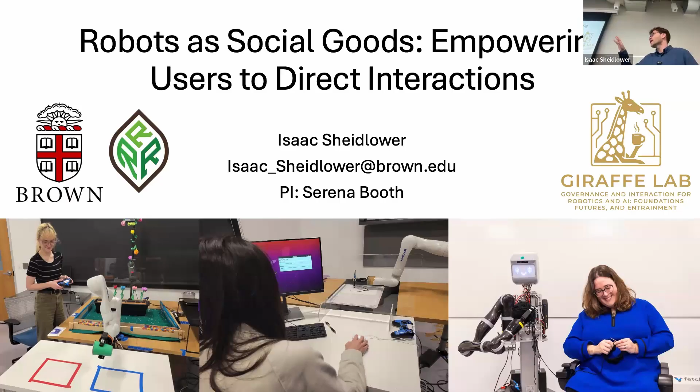And because this is an AI seminar, I want to start with the question of why robots? Why do I care about robots? Why should you care about robots?

Robots are, in general, a way of interacting with the physical world. They can be an assistive tool for different tasks. For example, a robot assisting people with spinal cord injuries or limited mobility to help them feed. We have different fetching tasks - you can imagine a robot in your home and you say, fetch me my laundry, or fetch me my milk for the morning, and the robot will go autonomously get it. There are various other assistive tasks you might imagine, like cooking, crafting, or fixing various things.

Robots can also be a collaborative tool. Here's an example of a robot assembly task where a robot is handing people parts of a structure, and they're collaborating to build the structure more quickly.

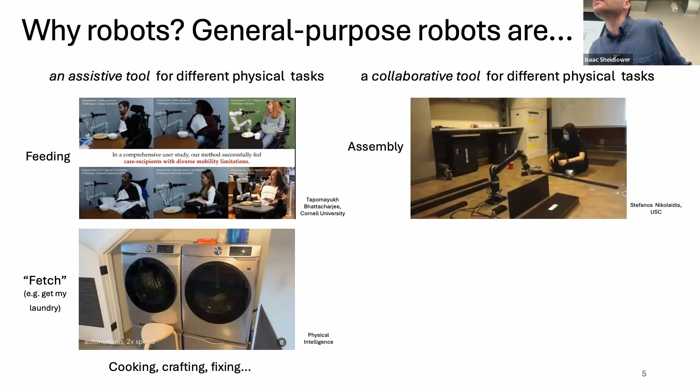What? So this paper specifically, I believe, was during COVID-19. Well, COVID still exists, but yeah.

Another example could be collaborative lifting. I don't have a cool video, but here's me and a robot collaboratively lifting this tray. But we could also think of collaboratively lifting a heavy box, for example, upstairs. And many more creative tasks, which we'll see some examples of throughout the talk today.

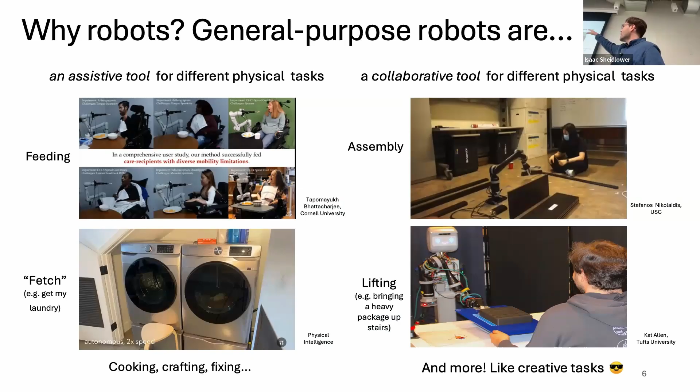So here we have this general purpose robots wording. What do I mean by general purpose robots? I mean robots that can be used for many different tasks as decided by users - people who are using the robot, as opposed to people who designed it. We can think of morphologies like robot arms or mobile manipulators, where they can do somewhat of an arbitrary range of tasks, or at least many different tasks. Whereas things like autonomous vehicles or Roombas, robot designers or manufacturers design them for a specific purpose, and it's pretty hard for end users to adapt them to different tasks.

So that's kind of what we're going to be talking about today: thinking about general purpose robots. Oh, and I should mention, feel free to interrupt at any point for questions, but I'll also have some specific pauses we'll ask.

So where are general purpose robots headed? I think a lot of industry and academia centers around this vision of the home robot, specifically this robot butler idea, where you own one or more robots, and they can help you do anything around the house, like chores or different tasks. Industry, especially recently, is very into humanoid robots as the morphology that can accomplish this goal.

This model of you're a family and you own a robot, or you're an individual and you own a robot in your home, is really great for a lot of reasons. One, you can personalize it over time - you own this robot, it's in your house, so you have lots of time to interact with it, and you can customize it to yourself. If you want to paint the robot a certain color, go ahead. And you can use it whenever you want, on a whim - you might wake up at 3 in the morning and say I need a robot to do something, and it's right there.

But I want to think a little bit about alternatives, and whether this model of robot ownership, or the future of robots, is equitable to everyone.

So let's start with a motivating example - I love motivating examples. Here we have Alex, who will be a recurring character in this talk. Unlike in this family home scenario, Alex has roommates - that's the twist. One of these roommates may or may not be the Lorax, it's pretty hard to know. But Alex and her roommates might not want a general purpose robot in their apartment - either it's too expensive, or one of them feels uncomfortable, especially with humanoid morphologies. They might not want a robot walking around the apartment all the time.

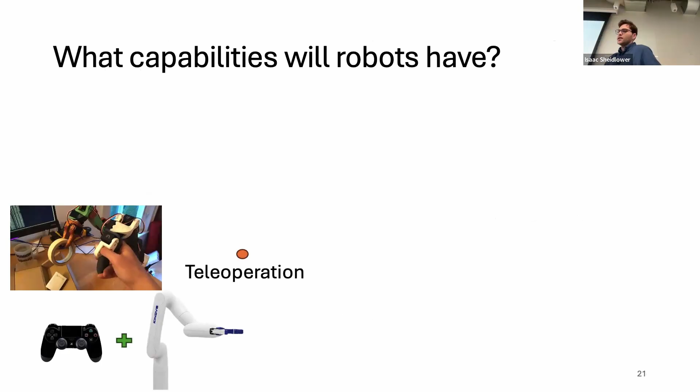Of course, the robot will have some autonomy. So there could be a set of autonomous policies, where a policy dictates the task and the behavior of the robot. It might be trained through different means, but it'll know how to do a bunch of basic things autonomously. So we expect a robot to be able to autonomously pick this water bottle up.

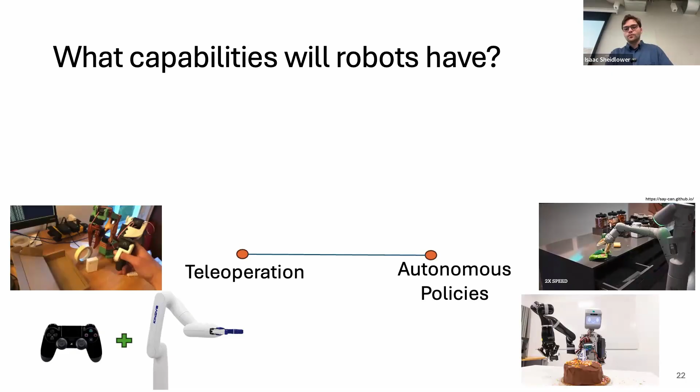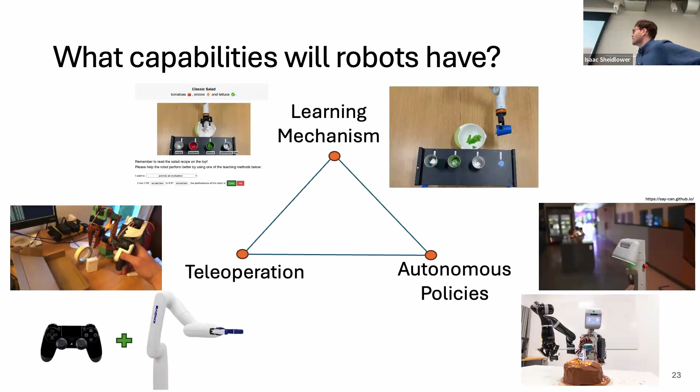And of course, because even as people we can't know everything, the robot will have some form of learning mechanism - some way of adapting to or learning after deployment. So it needs to learn, because it will try to pour the onions in and it'll miss the bowl a little bit. So how do robots learn?

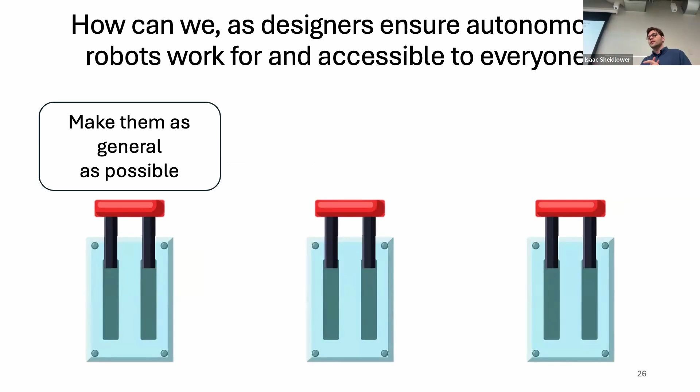So then, given the capabilities and how robots learn, how can we make robots work for everyone as social goods in this scenario? One option is to make them as general as possible - learning to do as many tasks in advance as we can. This is a very common approach in the robot learning community. We can also think of making them as adaptable as possible - a robot in a new environment needs to be able to very quickly adapt and learn to do new tasks. That's its own set of approaches we need to think about. Note these are all additive.

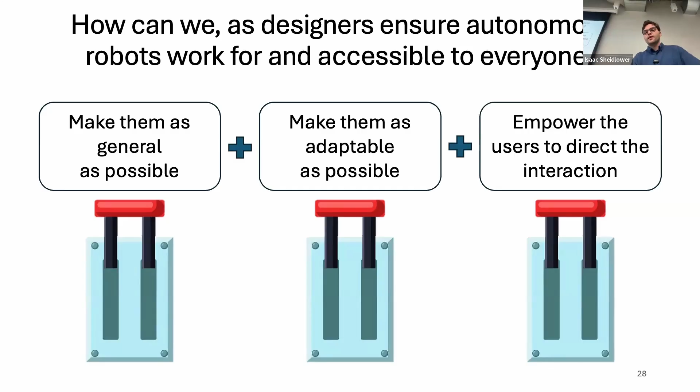And then, because we can't expect to know everything the robot might face, we could also think about empowering users to be able to direct and dictate the interaction themselves. So the first two are about how we as researchers enable the robot to be as capable as possible. This is thinking about how we give users tools to decide what the robot can and can't do specifically. We can't predict everything, and even if we could, we might not want to, because people like to have control over the technology.

So we're going to call these empowerment strategies, which will be the focus of the talk today. And really, each of these strategies or methodologies are about bridging the gap of control over the system from end users to designers.

So the first 2 are basically thinking about how users might interact with a reinforcement learning agent to control it and direct the interaction. And the last one is thinking about what sort of information people might need about a robot to be able to do these things.

Okay, let's get into the first empowerment strategy, personalized task execution. We're going to go into the most detail of this one, and this is based on a paper that was published at HRI 2024.

So the goal is to enable people to personalize robots' behavior in real time, whether that's for personalization purposes or to express themselves through a robot. And specifically, we want to empower people with control over the behavior of a task it can already perform. So the robot knows how to do a task. We want to think about customizing, for example, the style in which and the way it completes the task. And we'll see some examples.

So right, we've already seen these videos. RL is great at learning these optimal policies, this optimal way of completing certain tasks. And if we have a person in the loop, a person can teach preferences over these policies. So for example, in this case, it's the angle at which the robot should approach this table.

But ultimately, with both of these approaches, we end up with this single policy that needs to be retrained or retaught if a person's preferences change. So if my preferences change, I either need to change the reward function or I need to teach the robot my preferences. And there are scenarios where we might want to just be able to directly manipulate the robot's behavior.

So we need a formulation of how to do this and give people real-time control over these robots. So we're going to call this formulation online behavior modification, the framework or paradigm of what we want. And we're going to say there's 3 requirements of doing this.

So 1, the robot must autonomously make task progress. So what this means is if I have my robot and I try and personalize it to myself, if it starts failing at the task, that's not great, right? So we don't want the robot to fail.

Then we're going to say we want to define a set of behavior features that we can customize. So for example, in the video earlier, there was this angle of approach to the table. We might also think about customizing the robot's speed. And these different aspects of the robot's behavior, we're going to call these behavior features.

And then we're also going to require an accessible user interface. So we have these behavior features, we're going to call these K for each different behavior feature. And we're going to give people direct control over these features. And again, it needs to be interpretable and accessible. So if I change the speed of the robot, it shouldn't oscillate in some unexpected way, for example.

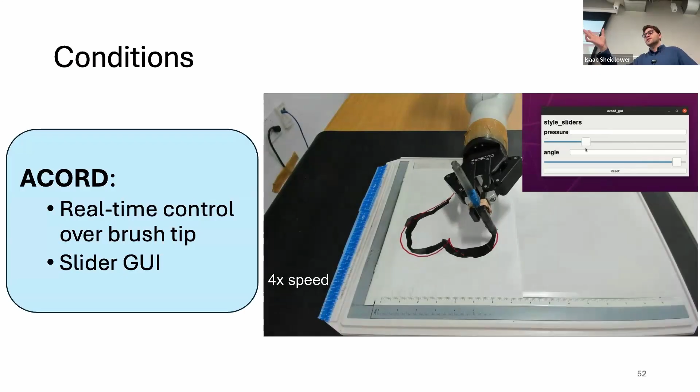Okay, so this is what ACORD looked like. We gave people a slider interface, and we defined two behavior oversight parameters. One was the pressure of the brush, so we can make thin or thick lines. The other was the angle of the brush, so we could rotate it as the robot autonomously painted. The robot is autonomously moving along this path while these values are being adjusted, and the algorithm learns to match those specific values. Again, people had practice with this interface on other shapes, so this is real-time control while the robot's also autonomously painting.

Another thing we looked at was reinforcement learning. We could imagine we have 6 predefined styles. A user selects a predefined style, and then the robot just paints it by itself. So there's no real-time user interaction, but this is analogous to a lot of existing robotic applications where you say, okay, what's your preference? You pick it, and then the robot does the task.

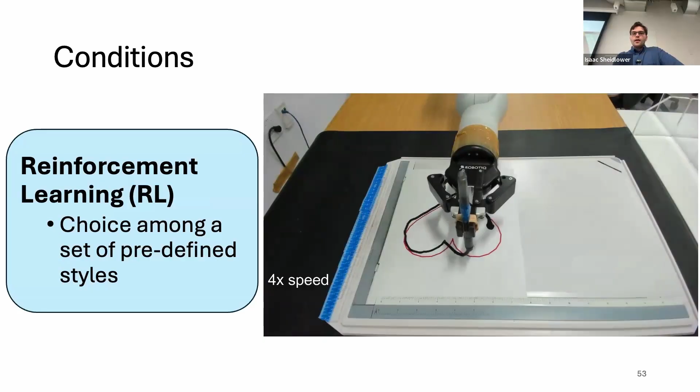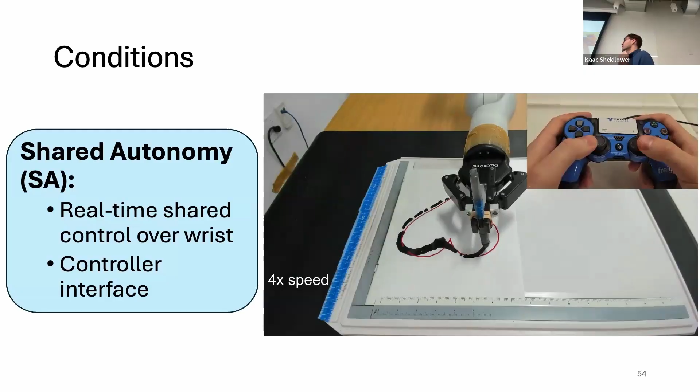And then lastly, we wanted to look at what if we gave people a lot of control over the system, and this was our shared autonomy condition. So people have teleoperation control over the robot, they can directly manipulate its actions, but while they do so, the robot's also trying to infer what style they want. There were 6 discrete styles we saw earlier, and as they're directly changing the robot's behavior, an algorithm is also trying to say, okay, I think you mean this style. There's sort of a blending going on there.

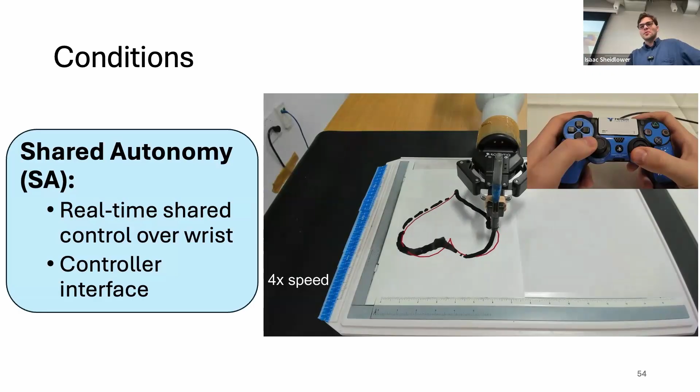Okay, so we had people come in. I think we had 24 participants, recruited from around Boston. We had a pretty wide range of people, which was nice. Let's look at some results - what did we learn from having people come in and do these paintings under these different conditions?

Qualitatively, ACORD in general, compared to the shared autonomy setting and reinforcement learning, people really liked it. People both preferred it the most, and it gave them a very high sense of expressivity and control. It was even surprising that people felt slightly more in control over ACORD than shared autonomy, because shared autonomy people had direct control over the robot. Some people commented that having direct control felt like too much control in a sense, so it was hard to manipulate.

But so that was great, that's sort of what we hypothesized. And we also saw some very interesting emergent behaviors, which is when users or end users do something that designers don't expect. Getting back to this robots as social good model, or this public library example, a ton of different people are going to be using robots. We can't anticipate every way they're going to use it.

So in the shared autonomy condition, people made polka dots. The way they did this was they brought the brush up from the paper, and then the reinforcement learning algorithm brought it back down. And so they could kind of play with it.

And even though they knew they weren't supposed to be doing this, because they're trying to cover as much red as possible, it was really fun for people. And then in ACORD, what people were able to do is wiggle these oversight parameters, which are essentially latent variables, back and forth very quickly. And it caused the robot to make very interesting brush strokes. So here we can see very varied strokes in the painting.

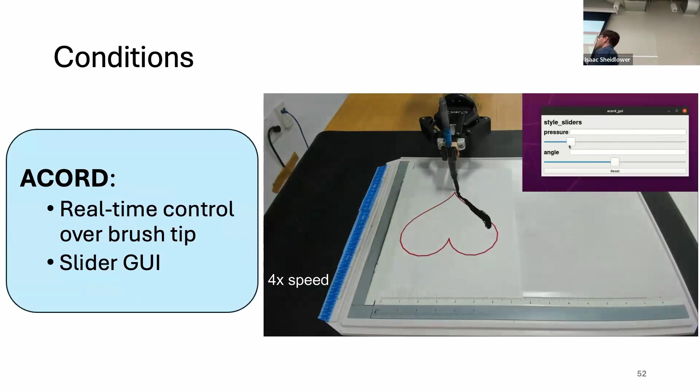The question was, how did people use ACORD specifically to compensate for the offset? So the way they were able to do this - it started off great, but basically the angle of the brush, which was supposed to be fixed, in a combination they could actually slightly adjust where the line was.

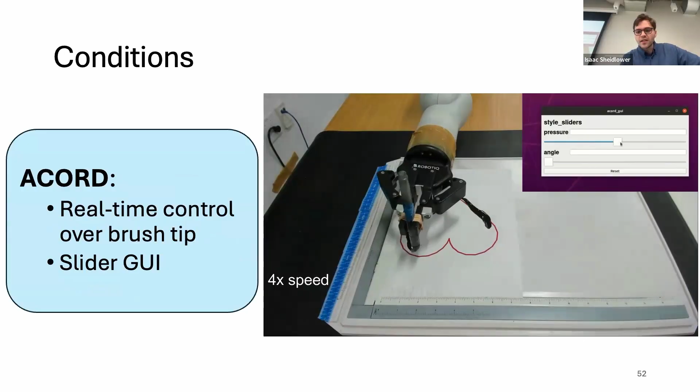So some limitations of this work - I think one was touched on with the question earlier, but we were looking at relatively simple geometric features. We could imagine how we might define the robot's friendliness as a behavior feature or something more abstract. So there needs to be more work to make an algorithm that can efficiently learn that and define those things.

And also we assumed that we knew what people would want to control in advance. So we had the pressure and the angle of brush predefined, but we can't predict everything. So future work could look at having users come in and co-design different features for different tasks.

You showed three: one is fixed policy, the second was ACORD, third was shared autonomy. Did you have full teleoperation for the user?

We did not have full teleoperation for the user. The reason is that task is potentially too difficult within a constrained lab study for people to do effectively. Also, if we set up safety constraints, even with teleoperation, people might find a way to violate them. That's a limitation on our part, but we didn't really view full teleoperation as analogous. So the through line to all of these is that the robot's autonomously tracing the shape, and it's just the style that we looked over the spectrum of control.

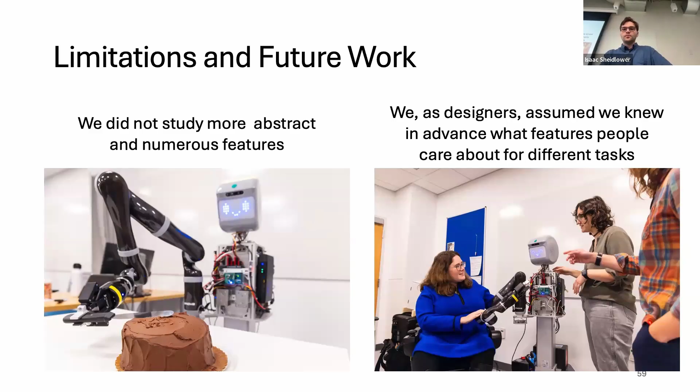Okay, great. So let's go to our next empowerment strategy, as we called it, which is facilitating innovative collaboration. The goal here is to empower people to leverage existing behaviors of a robot to perform novel tasks. Again, we're going to focus on creative tasks, but I'll give some other examples.

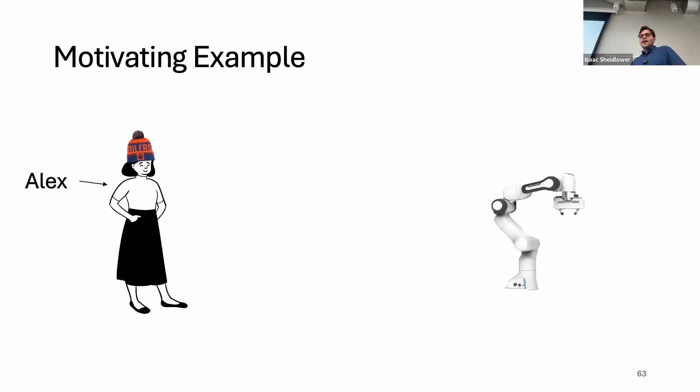The first, ACORD, was really about using an existing policy and customizing it. This is about using an existing policy for an entirely new task, separate from the predefined one. So, motivating example: again here we have Alex in her Oilers hat, which is exciting. Like we said, Alex has this robot—she may have gotten it from the library, or it may be her own robot. She has some form of teleoperation, and the robot has some set of autonomous policies.

One policy she knows of and frequently uses is this carry-liquid policy: hey, get me coffee; hey, get me water. This policy brings cups from place to place without spilling the liquid. Alex is a very creative person, and she decides she can leverage this to water her flowers. She has it carry a cup of water over her flower bed, then teleoperates the wrist to rotate it and water her flowers. This is a fun emergent interaction.

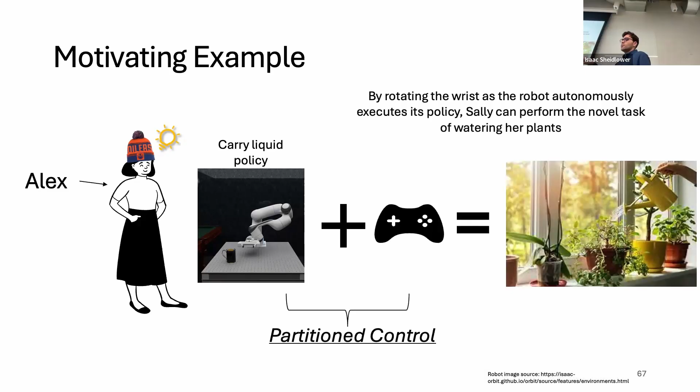We're going to call this type of control partitioned control, where the robot is autonomously carrying something or has autonomous actions, and the user is partially teleoperating. Zooming out, we can think of more common examples: cruise control in vehicles is partitioned control, where the person controls the steering while the car controls the speed. Similarly with drones—you can imagine a mobile manipulator where I'm controlling where it goes while it's carrying or doing a task with its arm.

So what could go wrong with this example? Do we get this interaction for free? The answer is no, especially if the policy was trained by reinforcement learning or some other machine learning mechanism. What the user is doing is actually asking the robot to fail—the robot knows not to spill liquid because of this carry-liquid policy, and the user is saying, okay, spill liquid now. How the designers designed the system to deal with that, the person might not know. So the robot might suddenly stop moving, which is a very common approach.

Intuitively, as roboticists, the most common thing to do when we're out of distribution is to just stop and wait and say, this is an unsafe thing, let's just stop moving. Another thing we might do is try to infer the user's intended task goal by asking what the person is trying to do with our system. But this is its own area of research and very difficult.

So getting back to shared autonomy, that's a lot of what shared autonomy is trying to do. Our key insight to enable this interaction was that the robot should act in accordance with what the person intuitively expects. So the person expects, okay, I've seen the robot carry this cup of liquid, and even during this interaction, the robot should behave similarly to how it has in the past. Does that make sense to people? Okay, great.

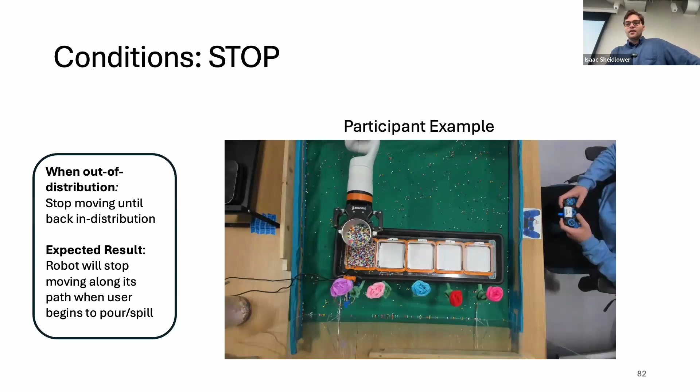Once IOTA detects that it's out of distribution, it imagines that it's still on its original path. Technically, what it's doing is looking for a similar state in its history of tasks, so it's not a perfectly straight line, but it's basically a smooth motion as the person pours.

So result-wise, people expected IOTA to do this. They expected the robot to do what IOTA did, essentially. With reinforcement learning, people were like, what's happening? They were very surprised by that.

Naturally, there's a strong correlation between meeting users' expectations and task performance. I'm going to skip this future work slide, but any questions about that?

So the question is, how do you measure if a state is out of distribution? That is a good question. What we did is we collected a bunch of rollouts of the robot carrying cups of liquid. So we had a data set, and then we trained what's called a deep out-of-distribution detector, which basically is saying, is this state similar to states I've seen before?